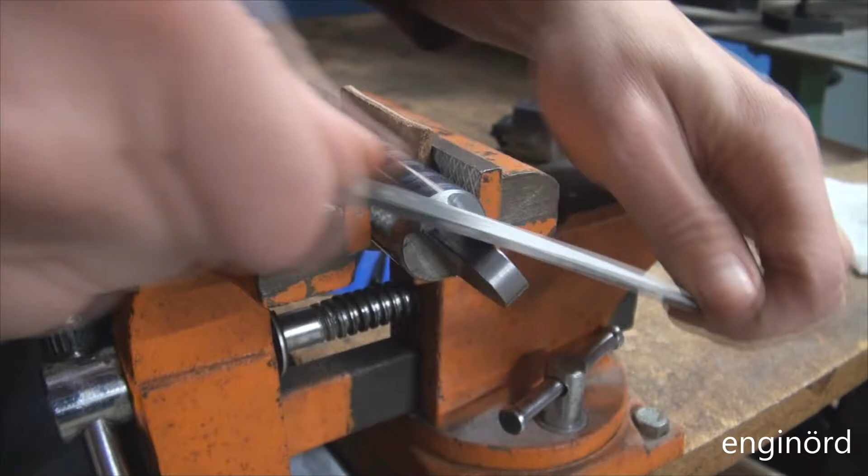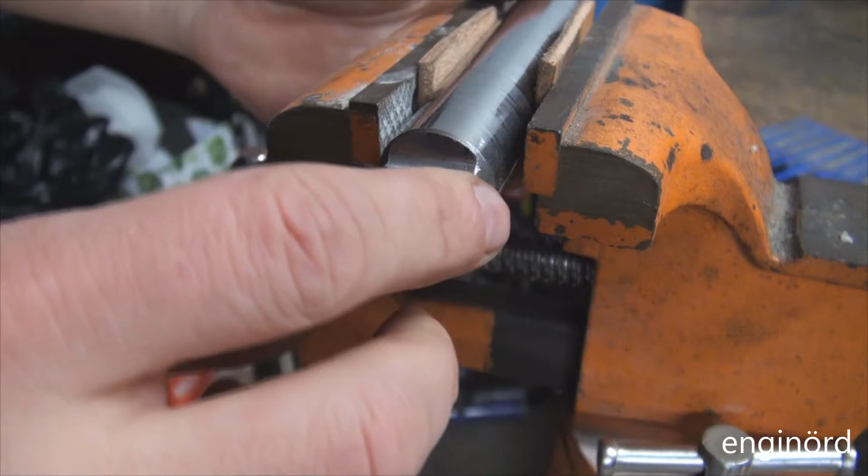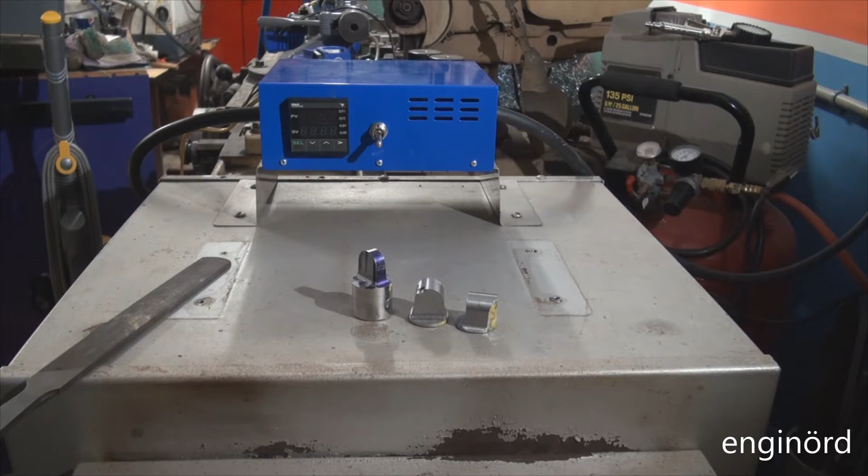Just turned on the kiln, and we're gonna set the temperature to 802 degrees Celsius, just like that. So now the kiln is on.

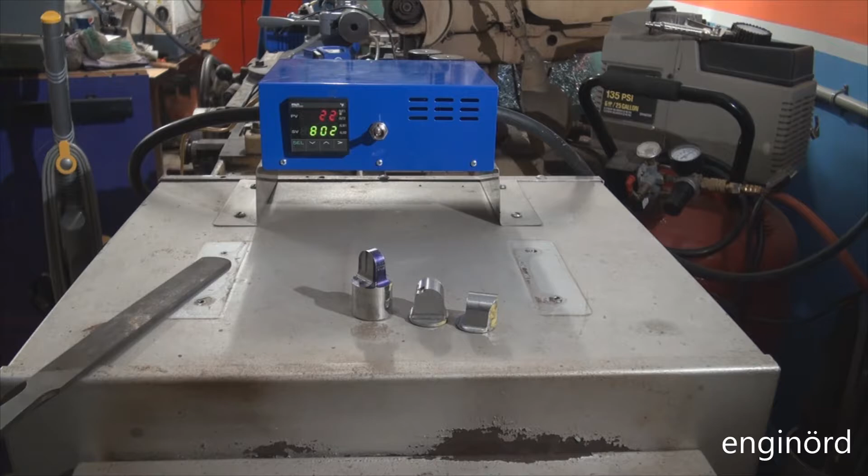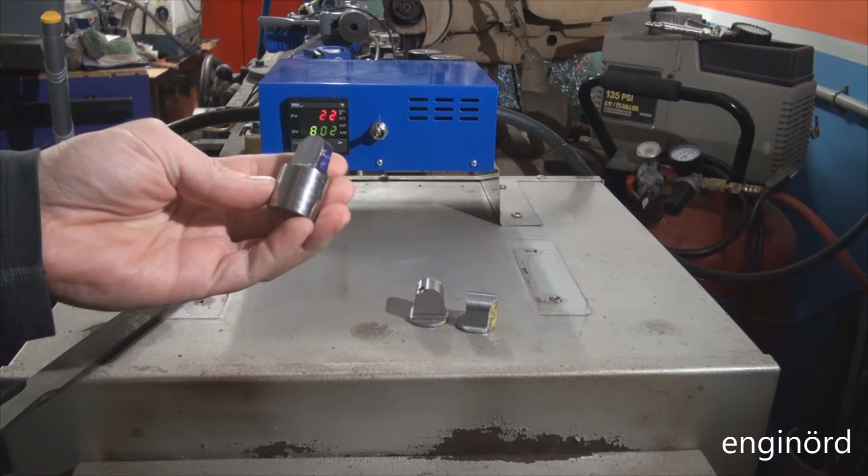I spent an hour and a half yesterday trying to get the ramp and the dwell cycles properly done, because this O1 tool steel doesn't like to be heated too fast. I don't know if it leads to stress cracking or what the failure mode is, but they recommend about 222 Celsius per hour, or 400 Fahrenheit per hour, heating cycle.

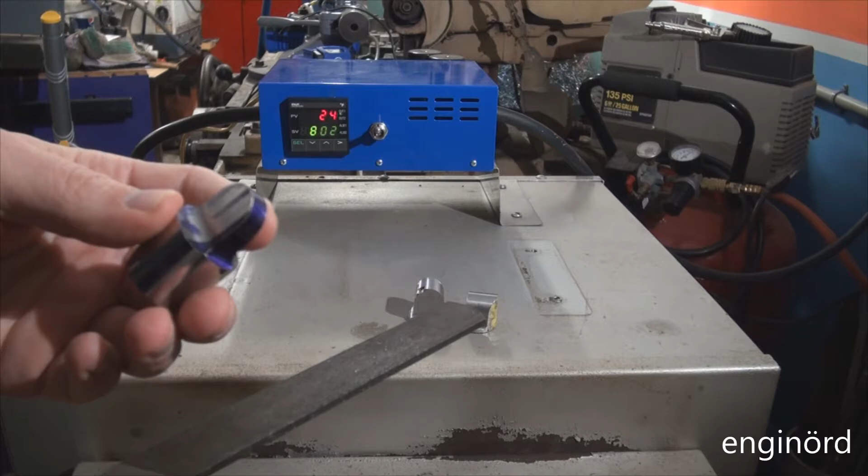As you can see, it's still in a soft annealed state. The file is gonna cut it. What we're gonna do is use these as test coupons and do a heat treating cycle.

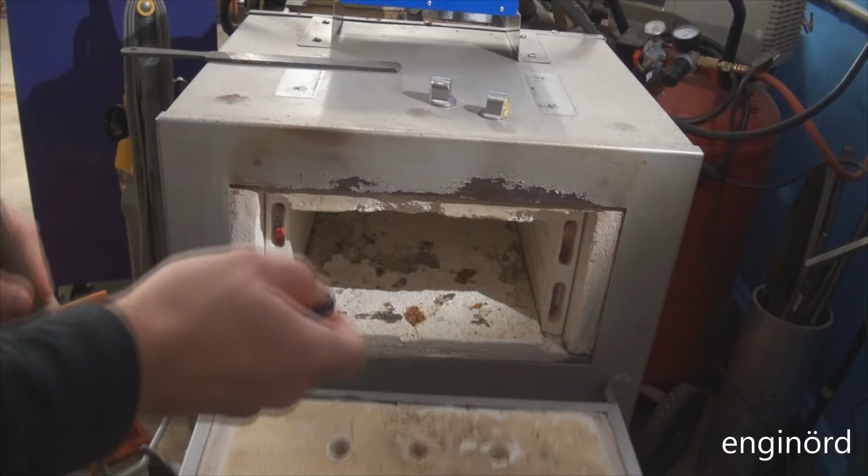So first we're gonna heat it up to 802 degrees Celsius, and then we're gonna quench it in oil. So let's bake some O1 tool steel. There you go.

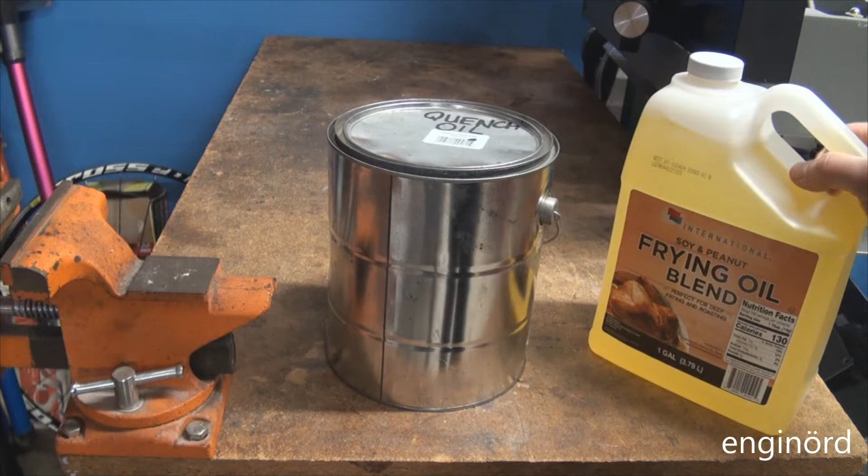Frying oil blend, soy and peanut, perfect for deep frying and roasting. Doesn't say anything about quenching O1 tool steel, but I think it will work. At least I'm gonna give it a try.

Proper identification is the utmost importance in the workshop.

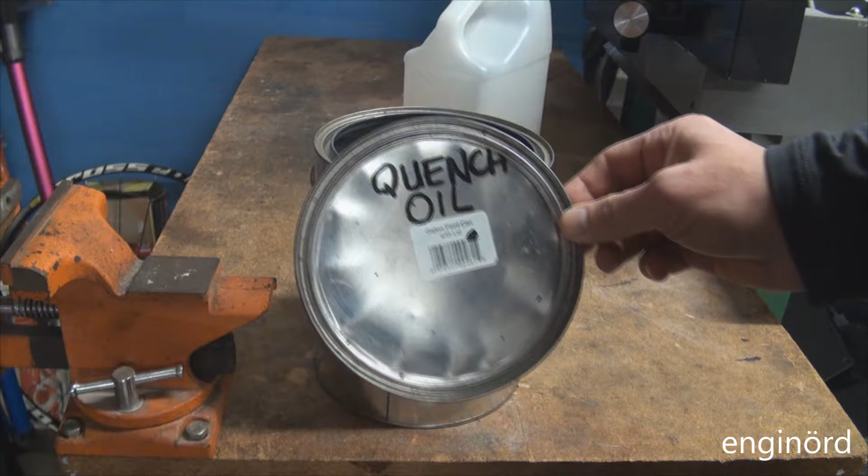Well, 3 hours later, the temperature is at 802 degrees, just as I set. I'm the king of repurposing. This is from the fireplace, so let's see if I can make it happen. Nice and toasty. There is the piece, so let's go and quench it.

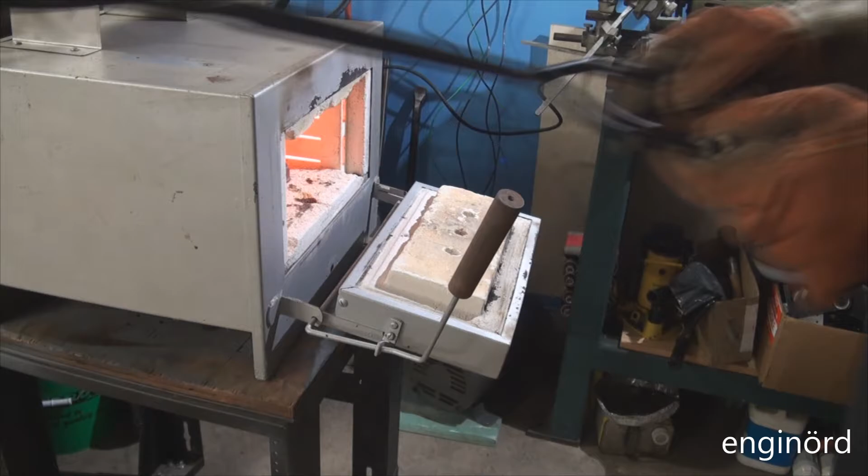These will be test specimens, just testing the waters. Caught fire a little bit, not much. Let's fish them out.

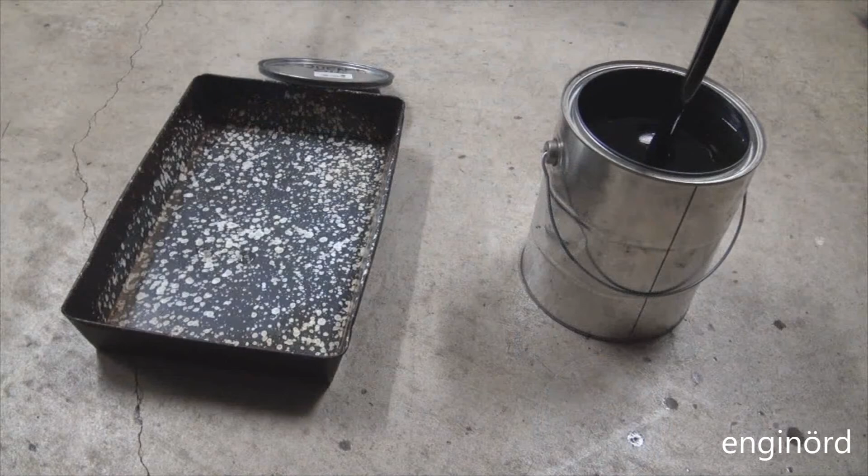Part is still pretty warm, so the oil did the trick, and the oil warmed up. I'd say it's about 30 degrees Celsius. It's nice and warm, but the part is still hot to touch. I can touch it at about 45 degrees centigrade. This is too hot to touch, so I'm just gonna let it soak there and cool down a little bit.

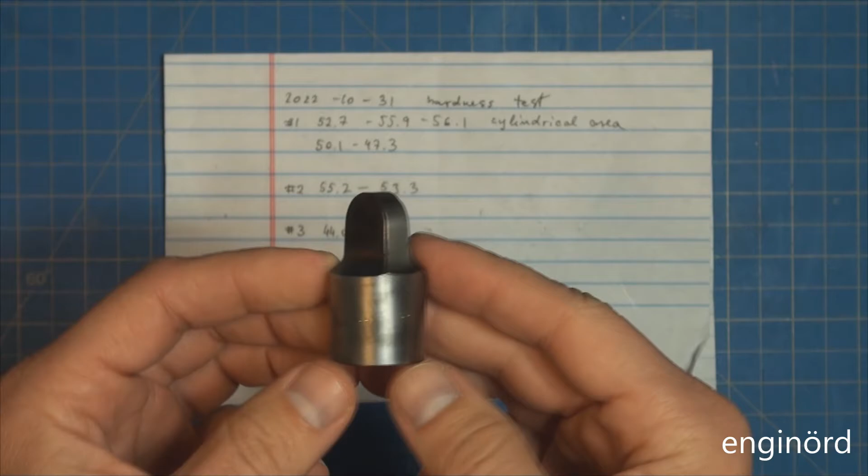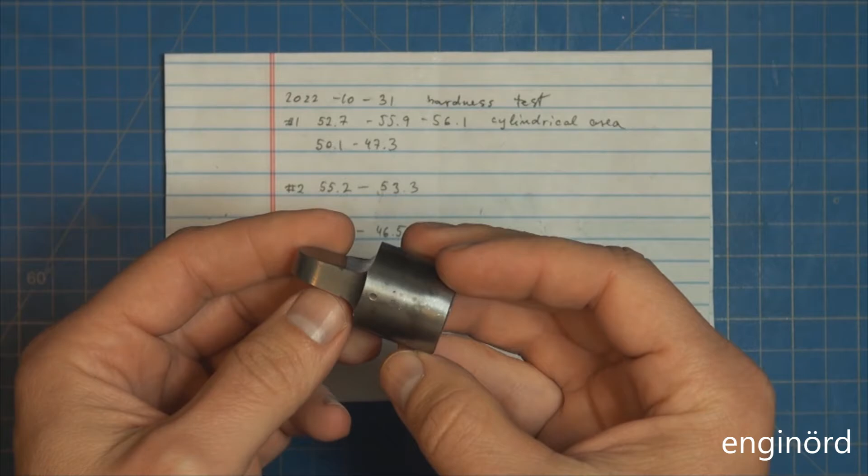This is how the parts look after the heat treatment and some cleaning. Just clean them with alcohol. As you can see, there's no mill scale. This O1 tool steel really stands up against the heat, so not much mill scale is generated.

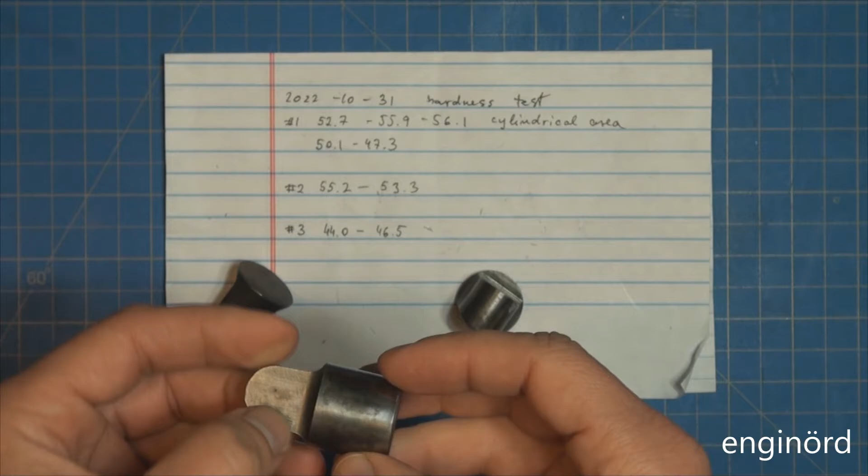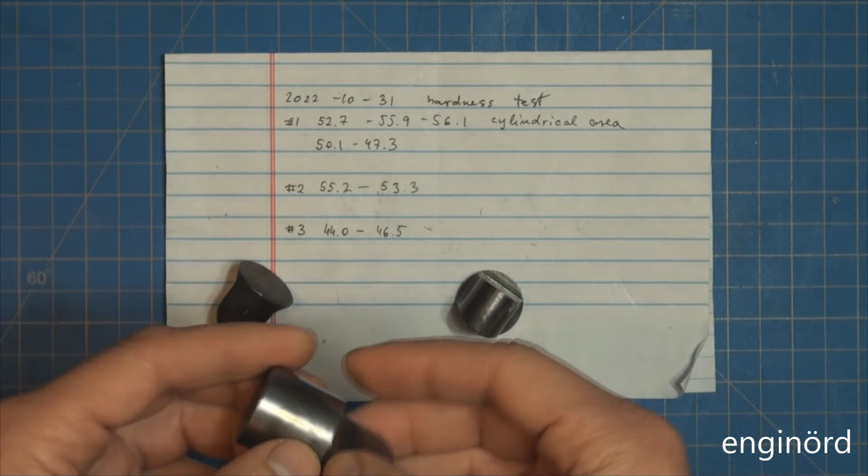The surfaces seem okay. I did a hardness measurement both on the cylindrical area and on these flat surfaces. So on sample number 1, it was 52.7, 55.9, 56.1 on the cylindrical area, and then on the flat surfaces 50.1, 47.3.

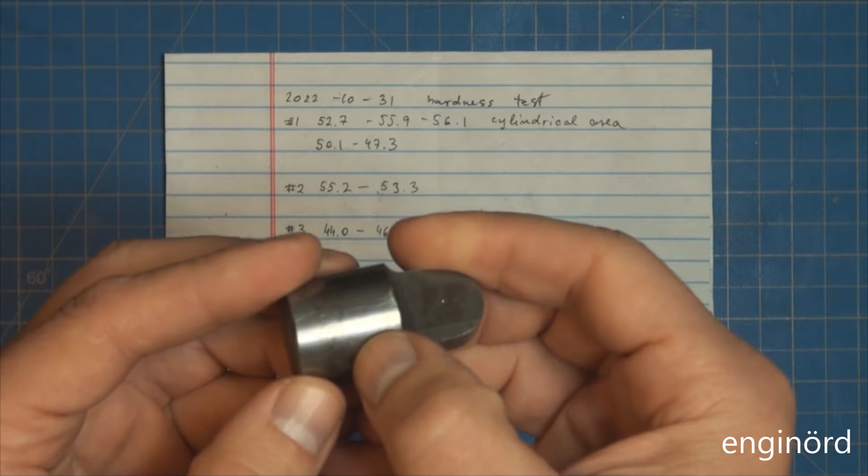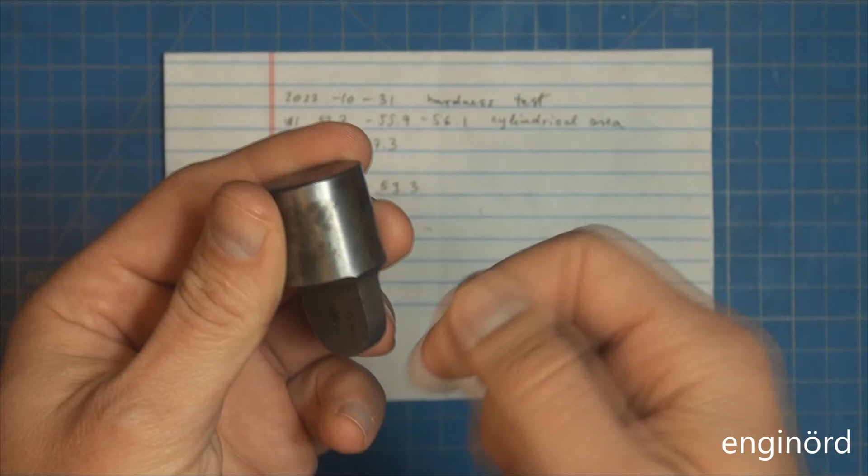You can see the little divots here where the hardness tester hit it. This is not hardness testing, this is what's called zeroing your Z. So when the CNC is coming down, you gotta find the tip of the tool, and I went a little deeper than I wanted to. Normally you put a piece of paper and wiggle it, but you know, I'm still learning.

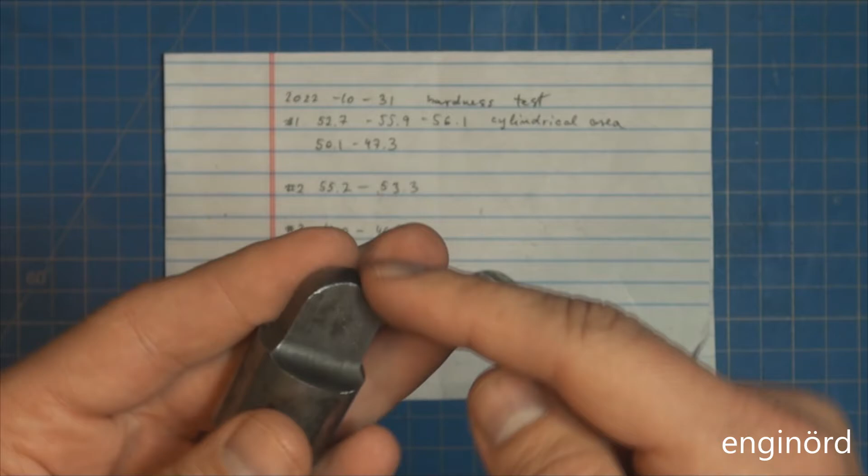As far as hardness, the file is gonna cut it. So whenever you see someone testing hardness with a file, it's kind of a low standard test, because the file can be 62, 65 or higher hardness. Some of these files, if you drop them, they're gonna shatter because they're through hardened, they're like glass. And you can see in this case, this proves that it's higher than 50 Rockwell, and yet it's cutting it. There are metal chips being generated. So that was sample number 1.

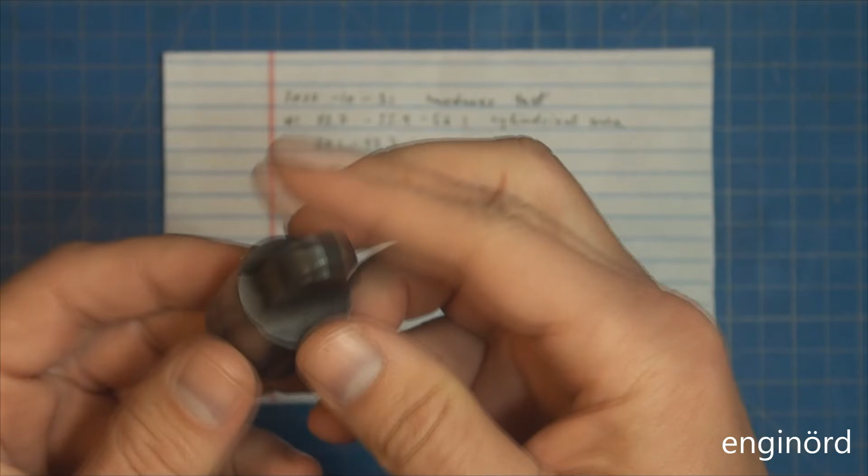So here's sample number 2.

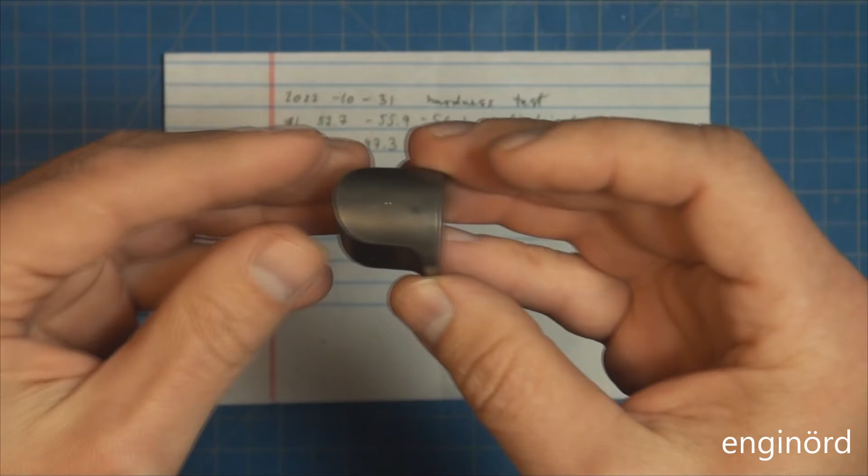Same thing, measured hardness right there, and on the cylindrical area it's 55 to 53.3, so mid-50s, let's say. So there's some room for improvement.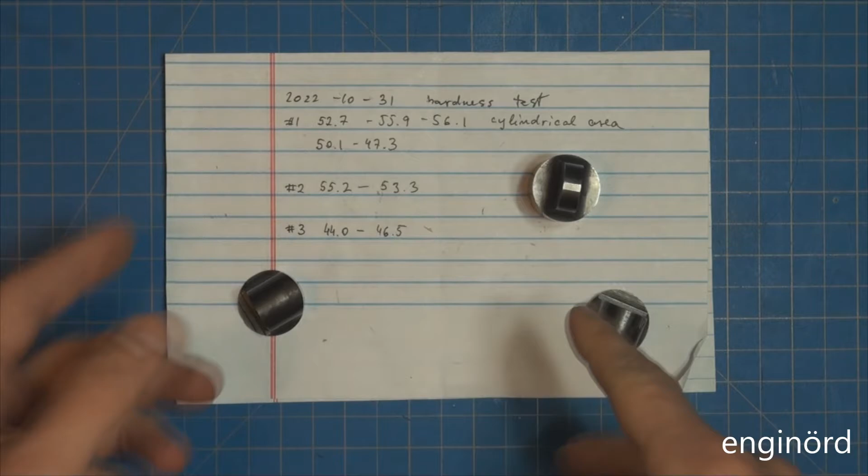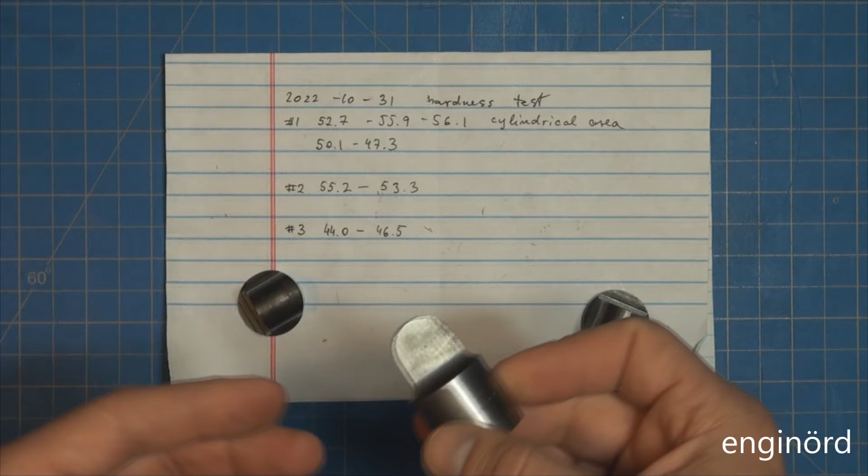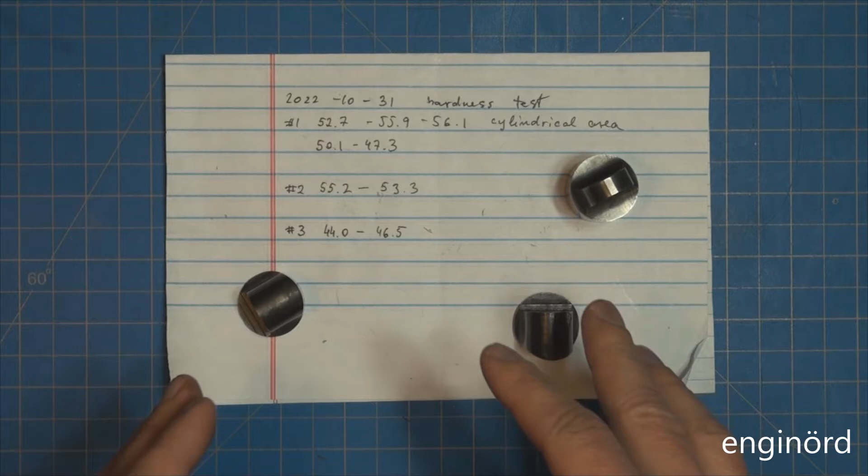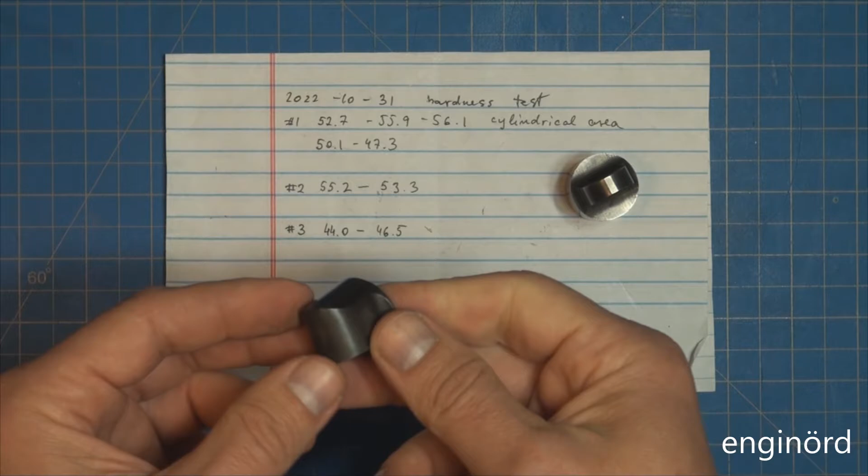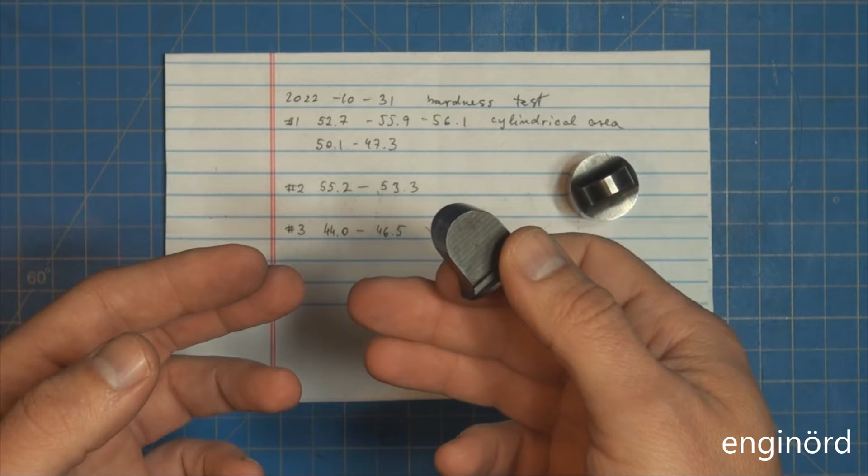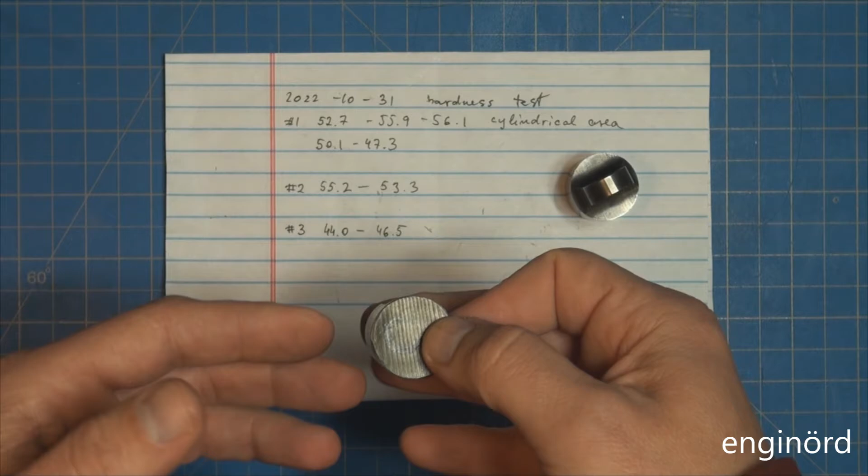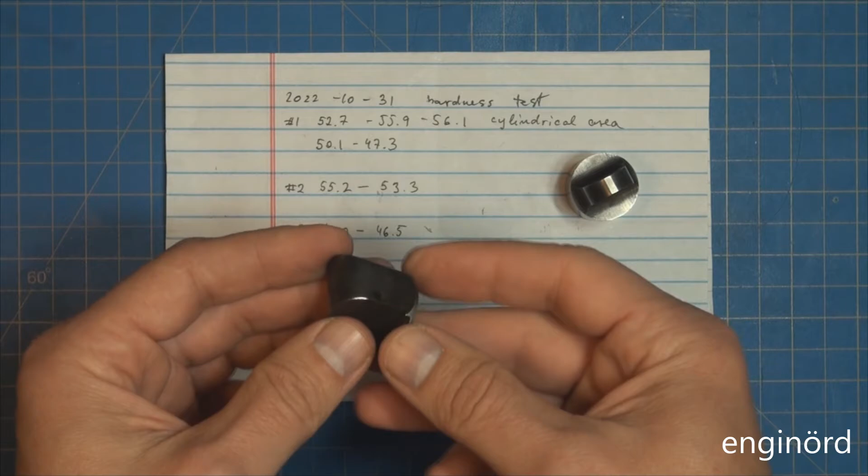Also, this was number 3. And by the time this was heat treated, the oil heated up somewhat. Now it didn't heat up to 100 degrees centigrade, it went from 15 degrees to, let's say, 35 degrees. But there's a lot to this process. Some people live their entire life controlling these processes in the industry, and that's what their knowledge is. And I think they have the best understanding of how sensitive these processes are, for any little perturbation. And I'm not even talking about material quality.

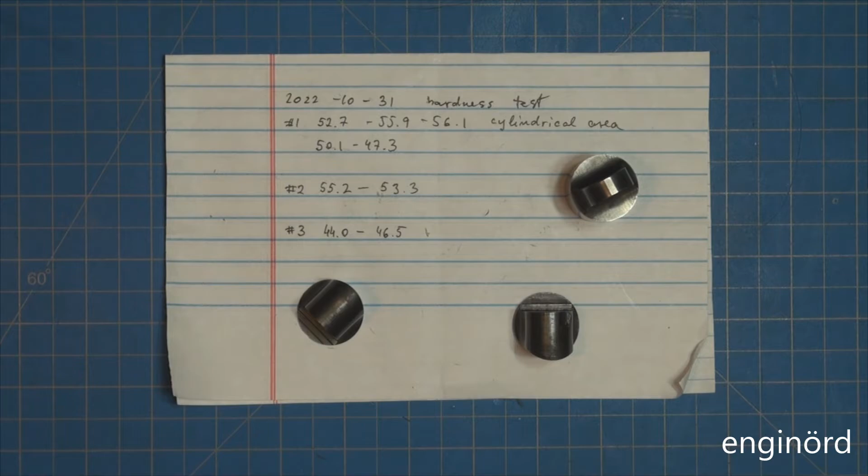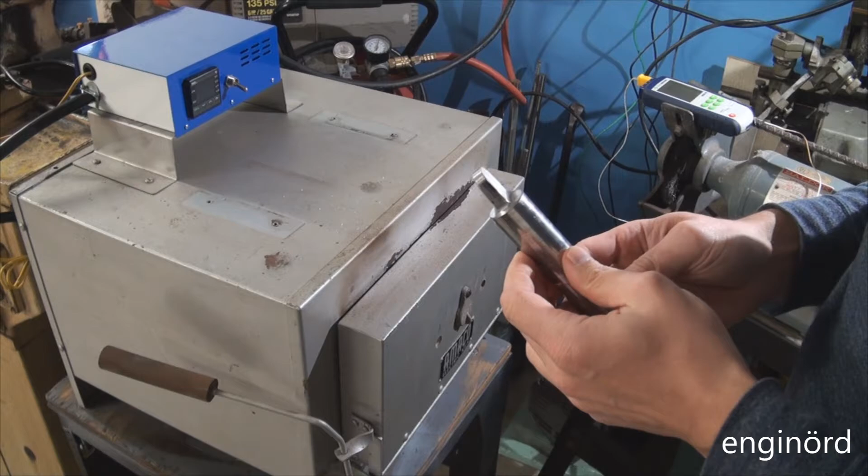As far as it goes, this one is the softest, and the file cuts it relatively easy, and a lot of metal powder is being generated. But that day has finally arrived.

The plunger or punch is ready to be heat treated. As you can see, it's O1 tool steel, so I'll have to bring up the temperature to 802 degrees, and there's a recommended rate which my controller will not be able to do, so it will reach the 802 Celsius in about 3 hours, and then I'm gonna have it soak for another half an hour. This is 1 inch diameter, so that should be adequate.

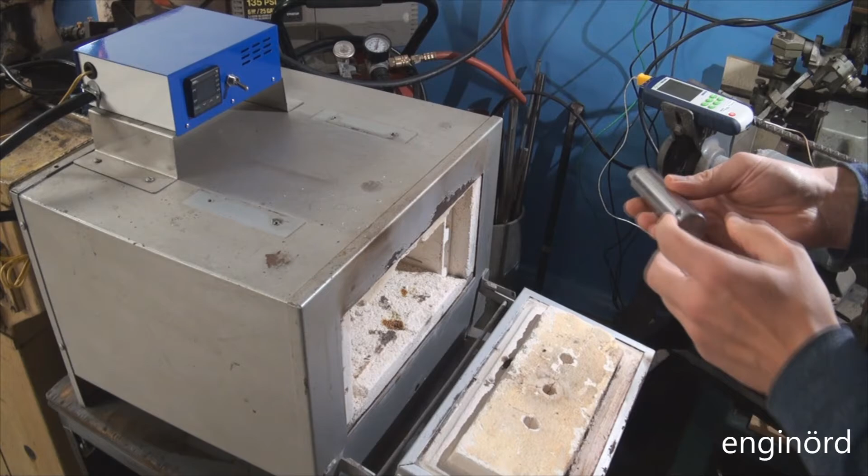So, ladies and gentlemen, please place your O1 tool steel pieces, because the doors are closing. Just like that.

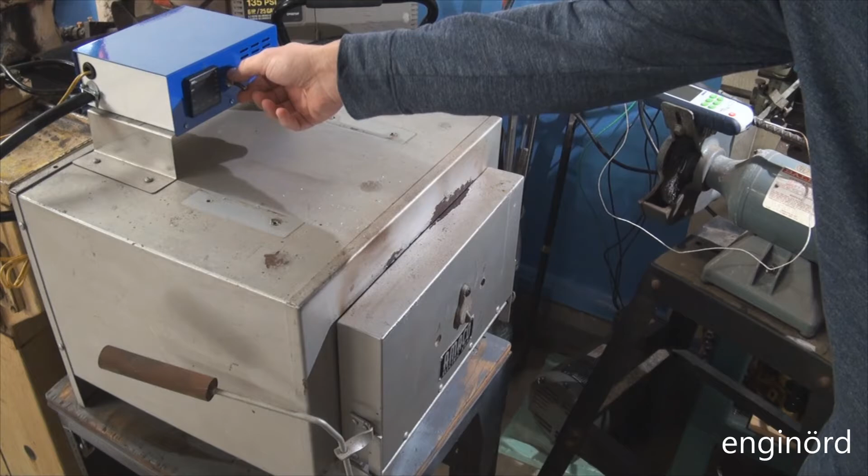Let's flip that switch, see if the PID controller is in the mood. So we are at 21 degrees Celsius and we are going to 802, sorry, not 804. And I have an extra thermocouple here that I'm gonna place just to monitor what is going on. This is a data acquisition device, and we can go to record mode. So it is recording right now, and later on I can download the data and evaluate how the rate was. I'm making notes because it looks like this is not the last time I'm gonna do it, and I want to rely on my past experience.

So you can see the temperature is rising. This one is at 30 degrees, that one is at 23. So we will see how fast it gets up to the 802 degree set point.

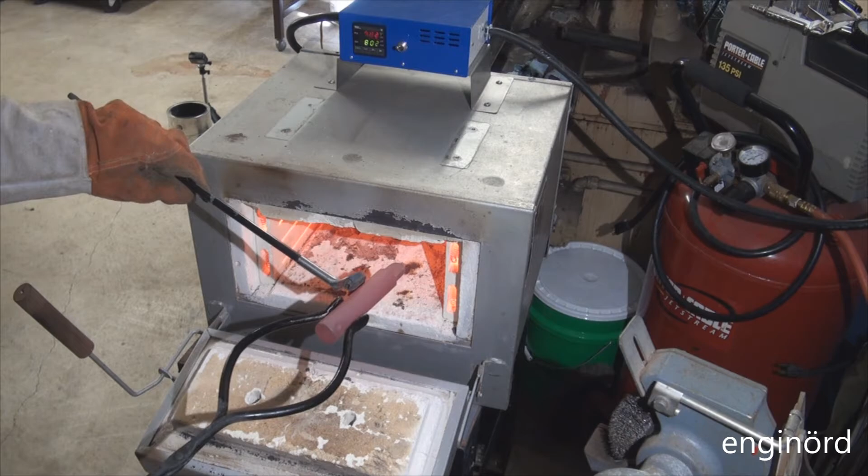We are in the austenitic phase.

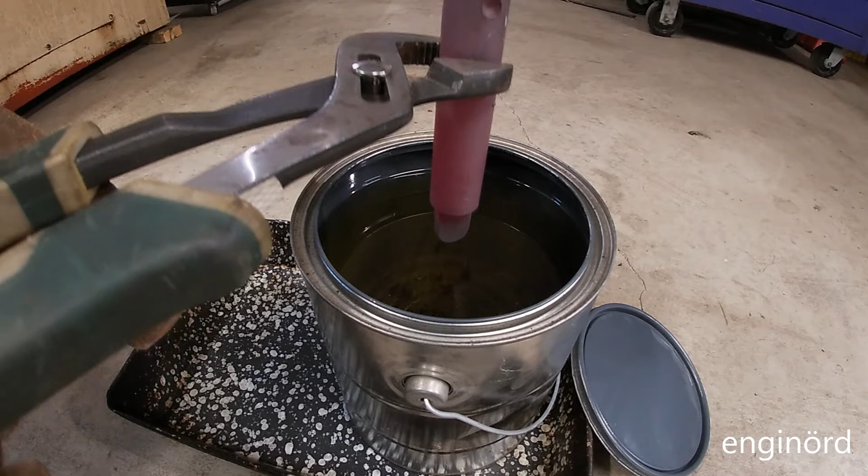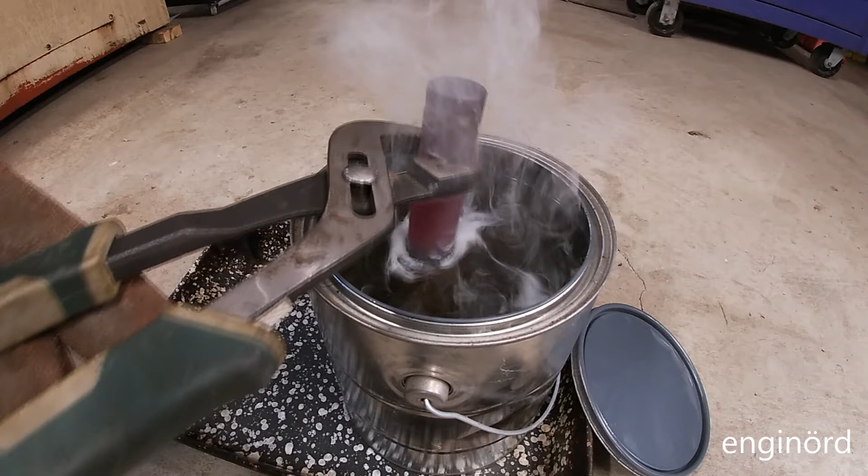So let's do the quenching. I'm just gonna quench the little end, and I gotta tell you, buddy, that nucleated boiling and convective currents have never been more fascinating to me. So I'm just quenching the end, I don't want to quench the entire thing. And this upper part is essentially holding the heat, and the only thing cooling it is the air, while the lower part in the oil is being quenched, and I'm actually stirring the oil with it so it's cooling more rapidly.

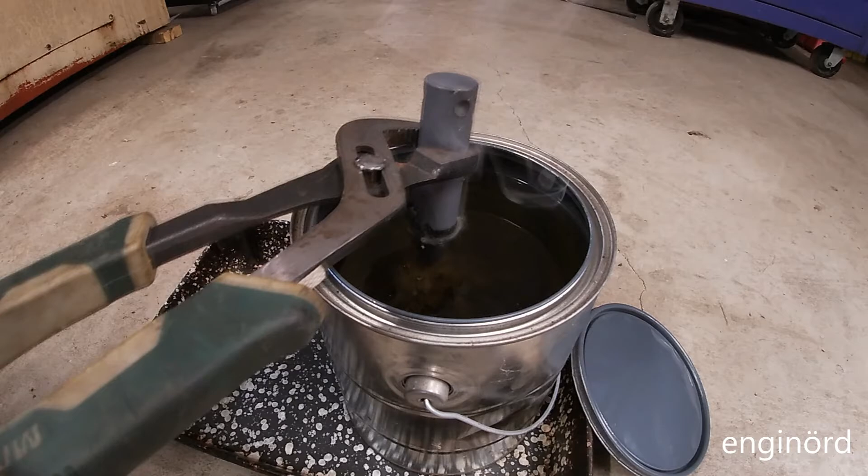And within the metal we have heat traveling from the upper part, which is still really hot, to the lower part, which is in oil. One other way to do this would have been just to hit the end with a torch and then quench it.

So by doing the 3 little samples earlier, I learned that stirring the oil with the metal helps the metal cool a little bit faster, and essentially that is going to lead to a higher hardness.

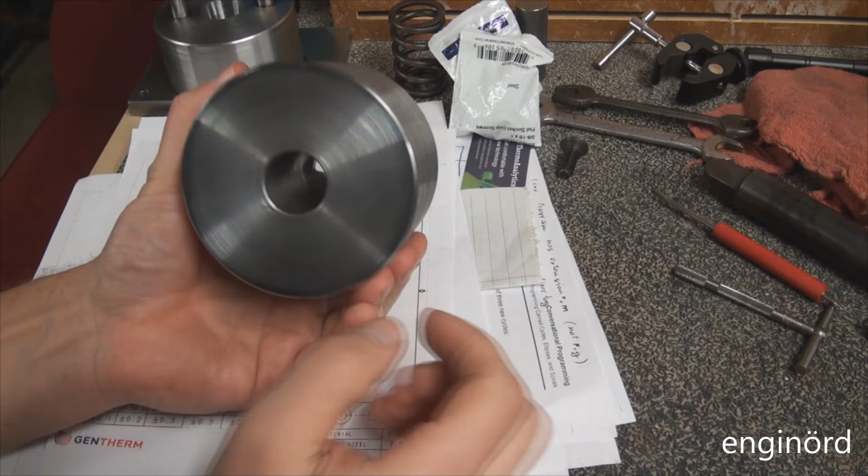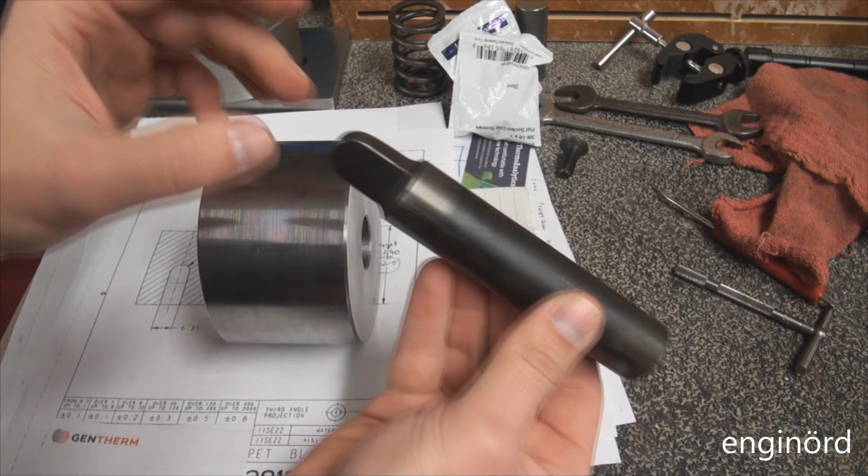Okay, so here's where we are. I adjusted the depth of the hole so that the plunger, when it goes in, it can come out on the other side, not only to 16 millimeters, but right now it comes out around 20. And in order to limit the depth to which the plunger comes out, I don't want to use that internal shoulder, I don't want this shoulder to be like the impact when I'm impacting it, because I'm afraid that this will get stuck. Instead of doing that, what I come up with is I added a step here to the top. As you can see, this step wasn't there before, and I machined a piece of metal, a piece of pipe, and by cutting this pipe to a certain length, that is going to limit how far this guy can travel.

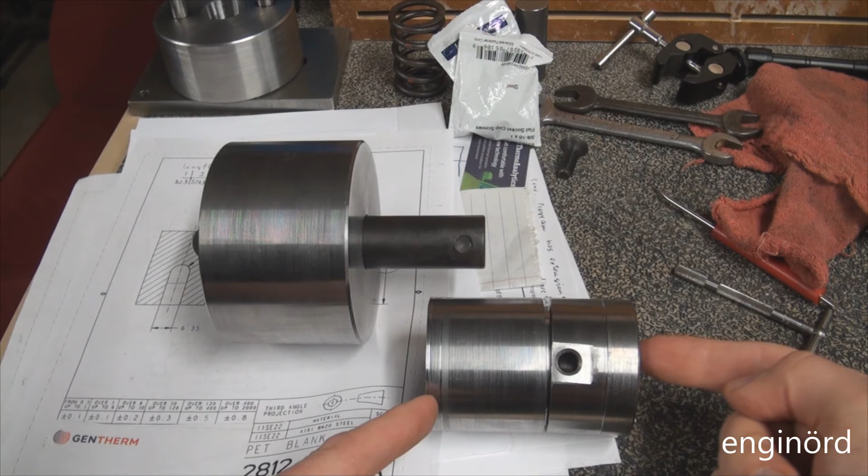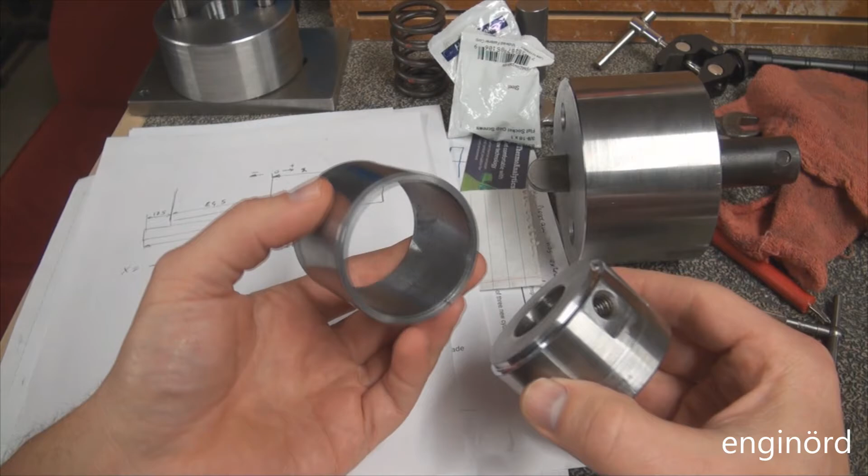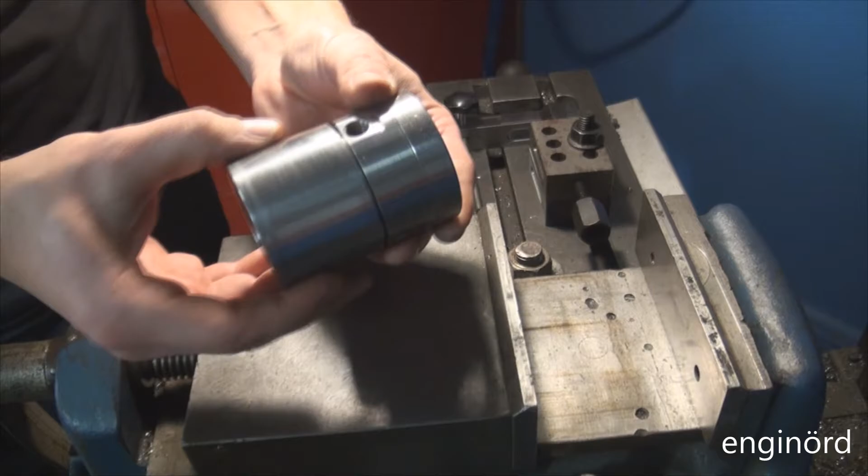And so I did a quick stack up here. These are all the dimensions that go into that stack up, and the length of the pipe came out at 44. So right now I have about a 1/10 of a millimeter press fit between these two. So I'm going to press them together, and then I'm going to finalize the length of this end, and hopefully that will give me the desired size or dimension for the plunger.

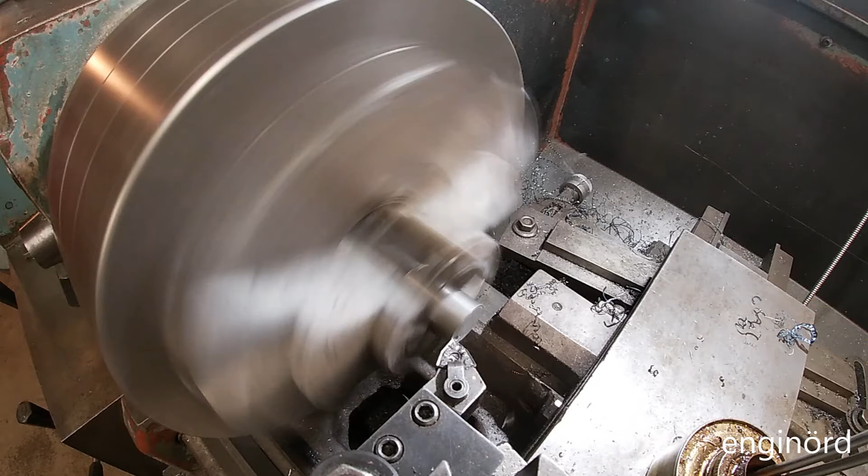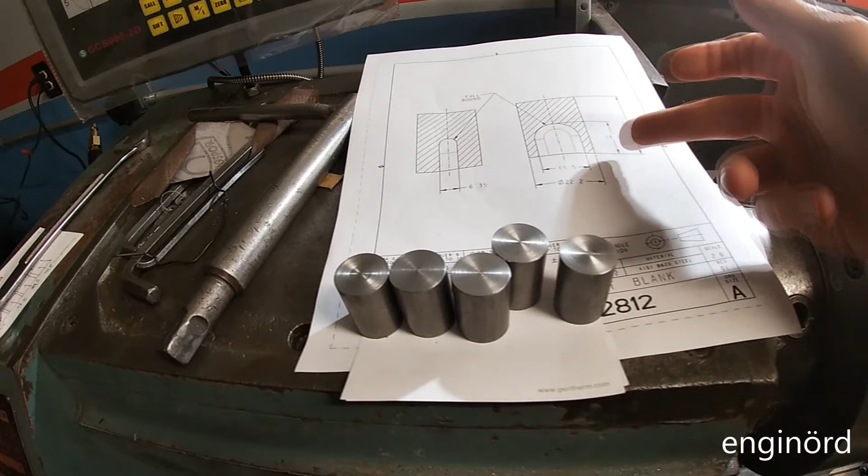I am making engine parts. These are going to be the slugs, or tappet blanks, made of 8620 steel, cut to size at 32 millimeters. All of them cut to length, then the ends are turned, and I put a little chamfer on it, just to break the edge.

The next thing is to cut this pocket on the CNC lathe, so that will be the blank basically that will be forged.

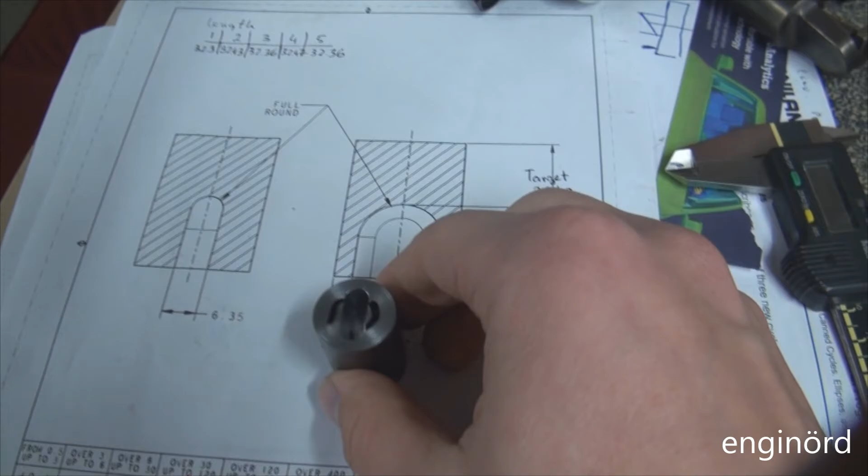Well, that blank is completed now. As you can see, I got 5 pieces.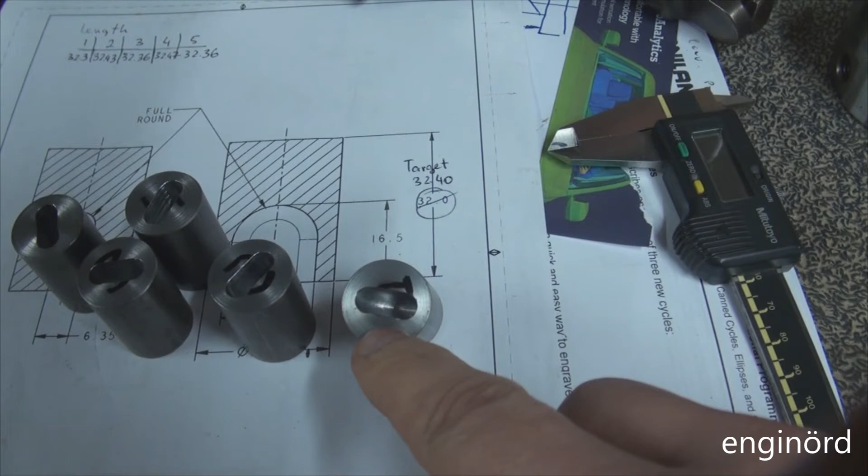Took me some doing with the CNC and the G-code, mainly because I was cutting a 1/4 inch slot with a 1/4 inch end mill, and that's not how CNCs work, so I had to be creative with my tool paths. Also, this interpolation on the bottom, when it's going in the XZ plane, the tool is moving inside like that. That interpolation flipped the circle. So anyways, just one of the things I had to deal with.

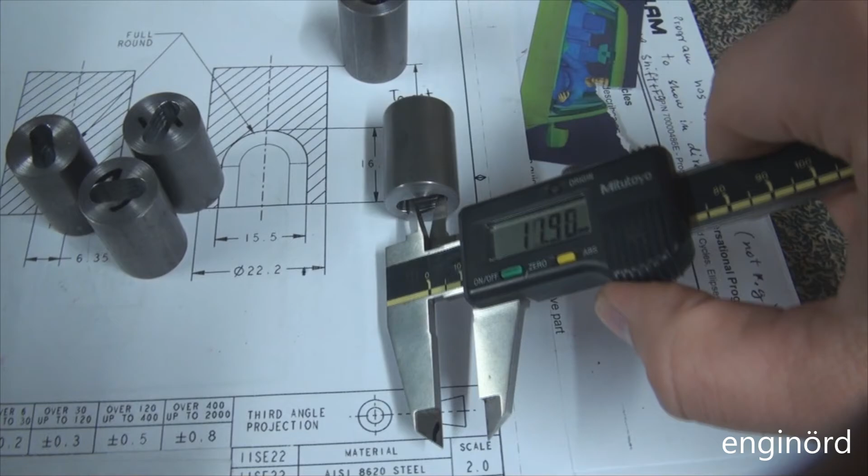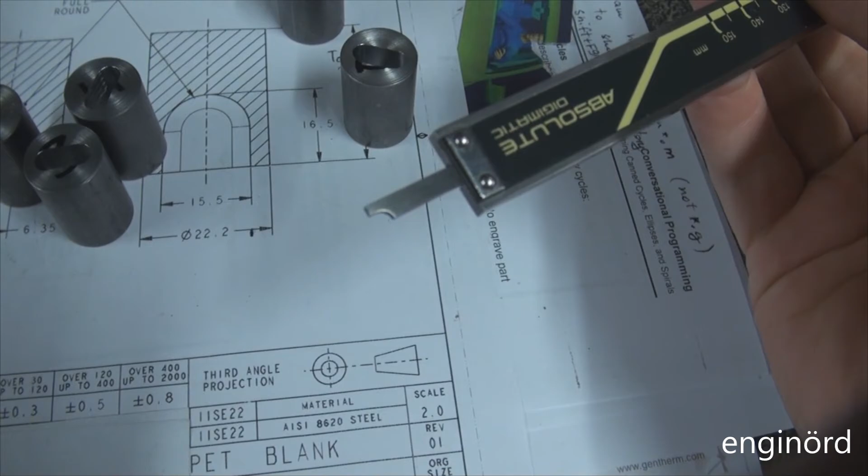As far as dimensions, you can see the width of the slot should be... there you go. The width of the slot should be 15.5, 15.48 - I'll take it. The depth, and this is not the right way to measure it, should be 16.5. Obviously this guy has a flat at the end, so it's not touching the circle properly.

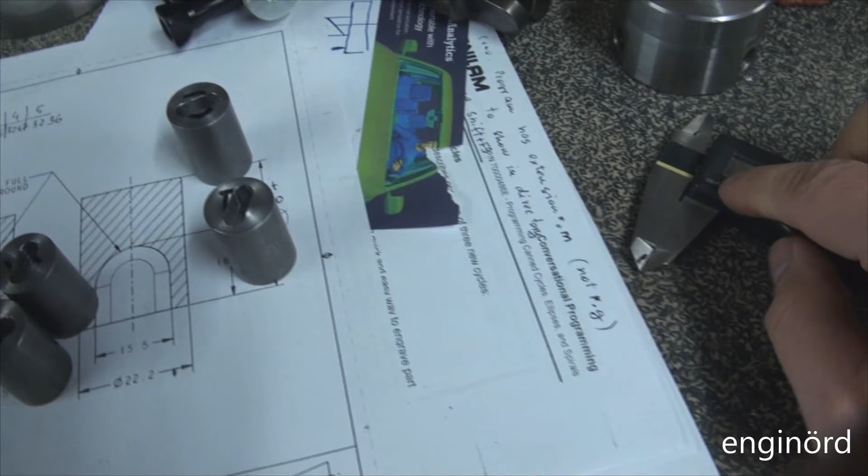And then the width is 6.54. So when it's cutting and it's filled with chips, it's not gonna do a 6.35, or 1/4 inch, slot - it's gonna be wider. We live in a real world, and the tool is just following the physics.

Next thing is to heat these up and try to forge them. This is gonna be the first batch I make for testing purposes.

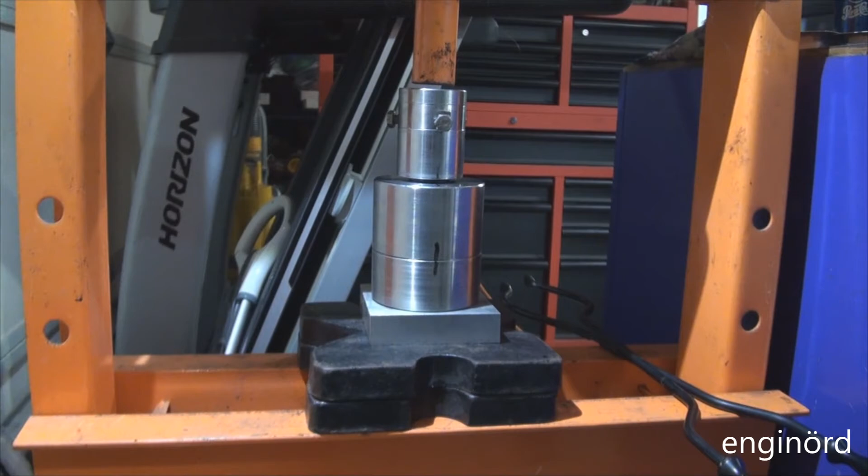Well, here's the result of the first test. I'm not calling it an utter failure - maybe it's half a failure. Essentially, it created a time bomb.

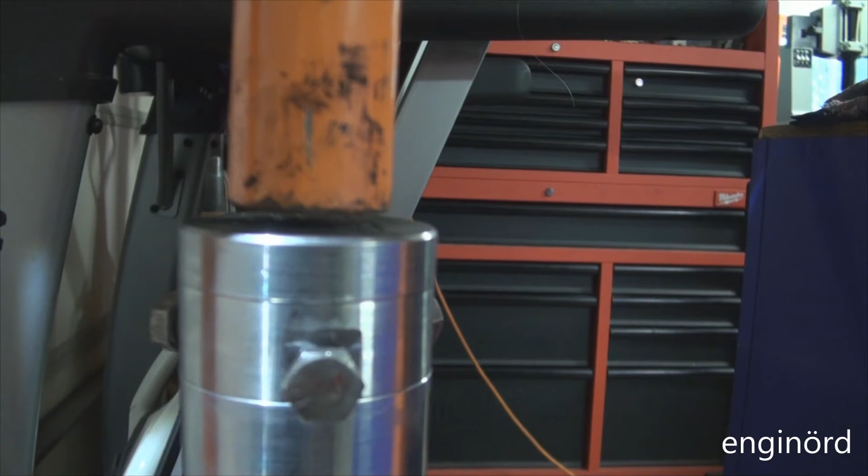So I got a slug on the lower part here, which was heated up to 900 degrees, and I got the upper part. There's a spring - so the spring right now is compressed. But as you can see, there's a gap between the press and the top of the tool. So what essentially happened is I pressed the tool into the slug and, well, it shrunk on it.

That was one of my fears essentially from the beginning. I was afraid that if this process takes too long, then the part is going to cool down and shrink onto the plunger, and that's what exactly happened.

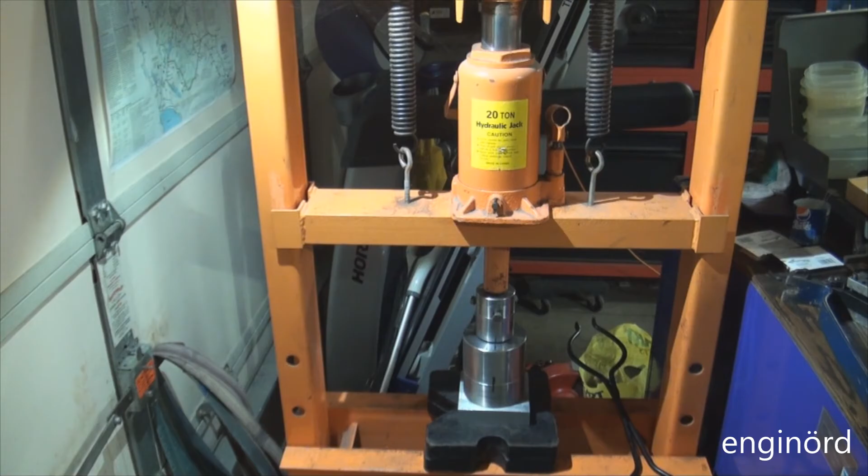That's why I wanted to use the hammer method, but first I thought I'd give a chance to the hydraulic press method. I got 4 more parts

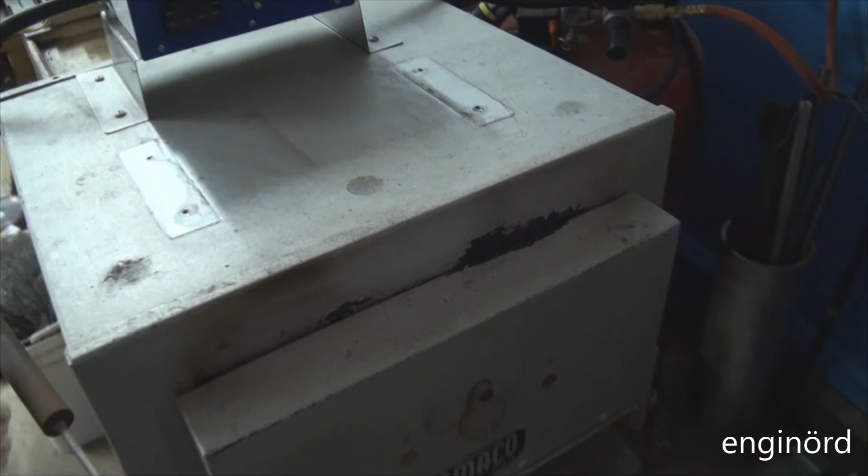toasting there, which they'll have to wait for their turn. I had to resort to the good old Bridgeport to separate the pieces. This is scale from the puck, and you can see there's more here.

So this is the lower tool part. When I was trying to insert the hot component, it basically got stuck halfway in and didn't go in, and this diameter inside I left about 1/10 of a millimeter. I think on one of the videos I talk about it, that it ought to be looser.

And as you can see, the spring is still compressed, so there's energy stored in the spring, and this guy is basically welded on stiff. I think I'll have to go and cut it off with a cutoff wheel or something of that nature without damaging the tool.

I'm not sure how I'm gonna do that, but that's where I am right now. Again, it's not a failure, it's just a little bump in the road.

After some close combat, I managed to remove the lower tool section, and then by loosening these bolts here, the cap and the spring came off, and I managed to do that in an orderly manner.

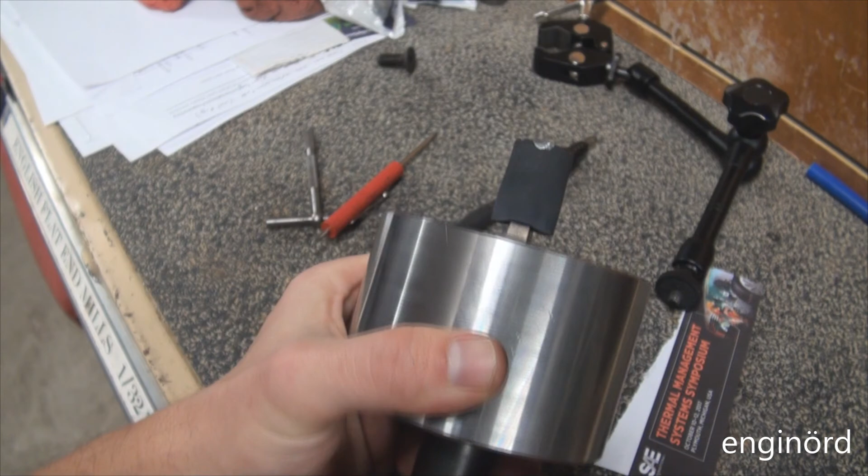As you can see, the forged piece is still at the tip of the tool, and what I can tell you is it bowed out on both sides, just as I was anticipating. It didn't crack through here - that's also good.

But I should have used some kind of surface agent, some kind of oil or lard or grease or something that would help with the removal process, and it has to be a lot swifter. It should just go in and out in a couple seconds, because otherwise this guy is gonna cool so fast that it's gonna basically cool on the tool.

Maybe the problem is I only have 2 degrees of taper. Maybe it needs to be more - maybe it needs to be 5 degrees for forging. I'll have to go and consult my literature about it.